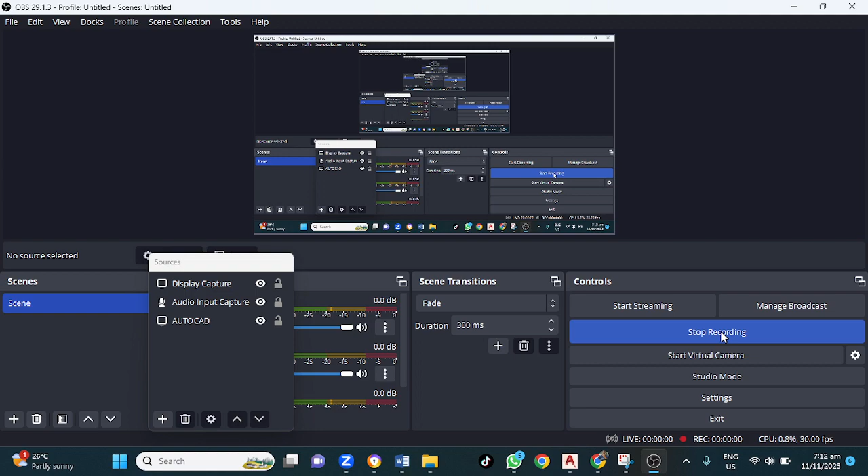Welcome back, guys. In this new video, I will be showing you how to draw a gasket.

This is a gasket mechanical component. The first thing to do is to observe and study the drawing, and determine how you intend to start it.

Here we have an overall length of 80 and a width of 25. We have three equally spaced semicircles here and three equally spaced circles up here. We also have a line drawn at an angle, and some small circles placed at the middle between these two points. These also seem to be equidistant, and the space here is also equidistant.

The distance between each pair of circles here is 4 millimeters, with a radius of 1 millimeter. We also have a fillet radius here of 2 millimeters.

To get started, the first thing is to establish a rectangle 80 by 25. I am already in my construction layer. I'll type REC for rectangle, enter, left click, drag, enter 80, 25, enter. That is done.

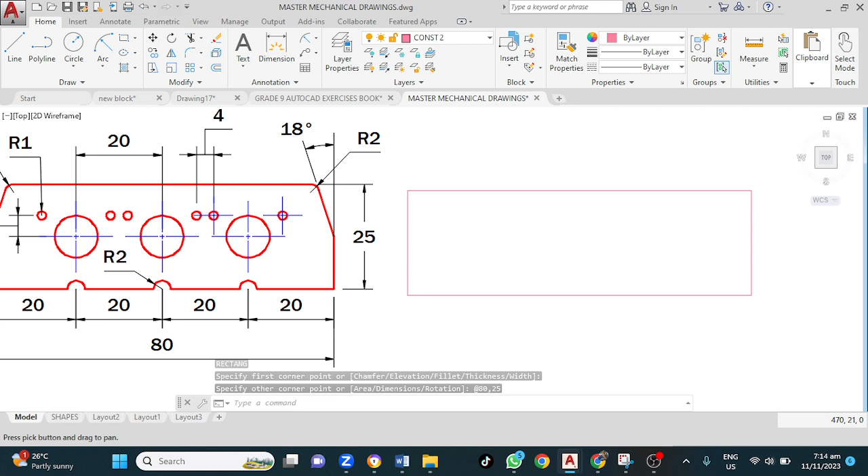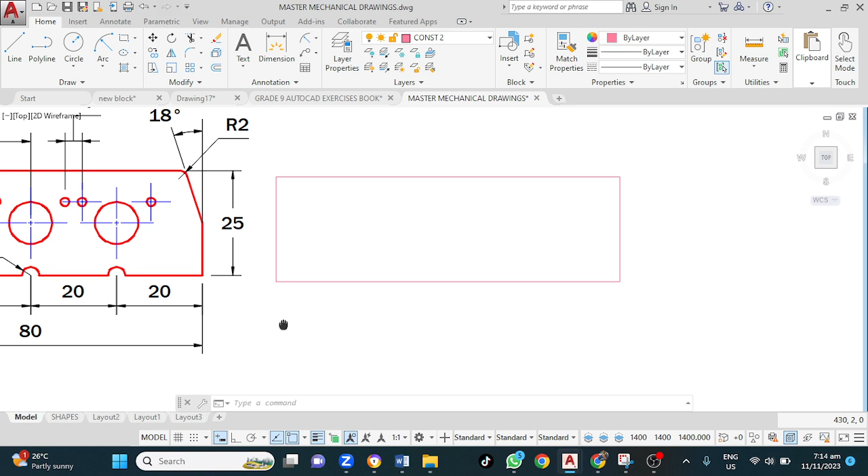My next step is to establish a draw line here. This is 25, so the midpoint is 12.5. I will draw a line from here across the middle. So L for line, enter key, left click here, then drag to the next end, left click, escape. That is done.

My next step would be to divide this into, we have 1, 2, 3, 4 equal spaces, which gives us 1, 2, 3 lines. So my next step would be to divide this into 4 equal parts. Type DIV for divide, enter. Left click on object to be divided. Number of segments I want, as requested by the command bar, is 4. Enter.

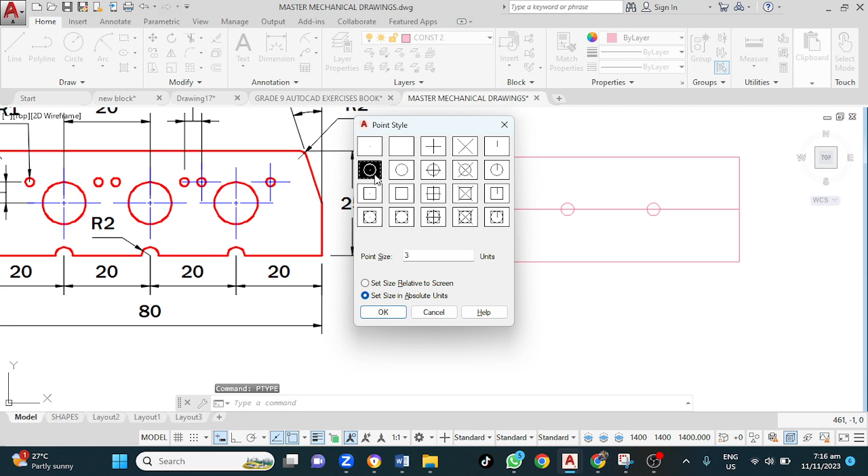Just in case your nodes don't pop up, it's simple. Type P-TYPE, enter. Change from the dot to any one of these, then that's it, just in case your nodes are not visible.

The next step is to explode this. So I left click onto that line, then type X, then press enter.

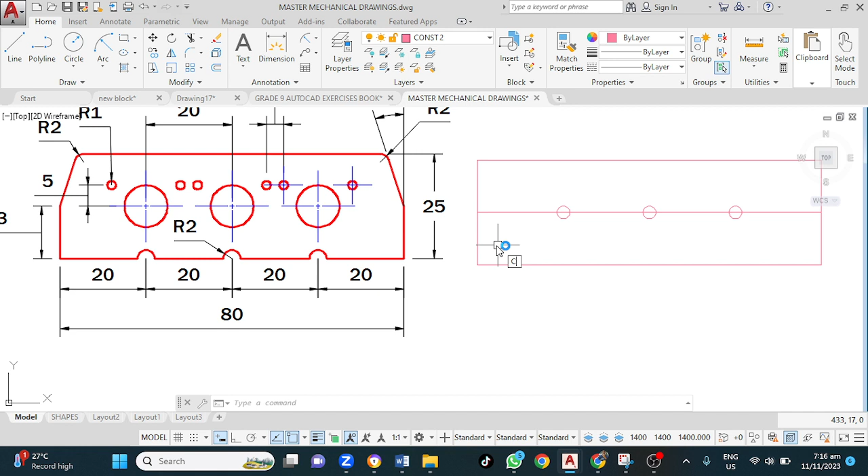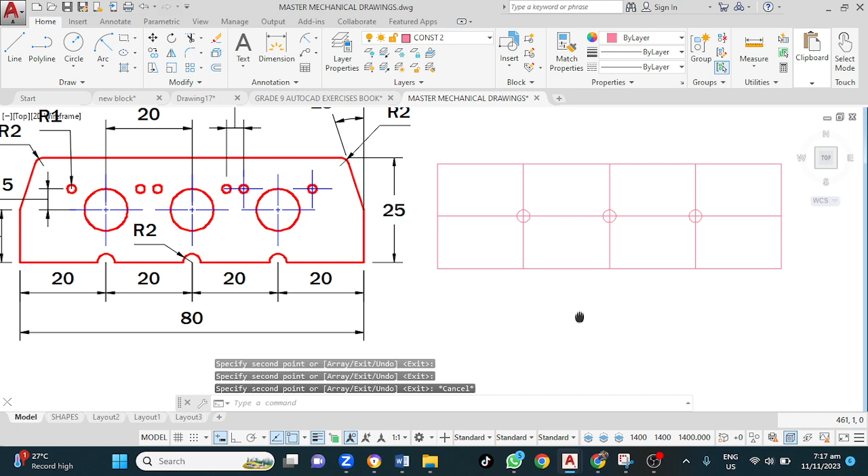This is now exploded. My next step is to copy this line to all these 3 points as seen here. So I type CO for copy, enter. Left click on the line to be copied, press enter to accept the object. It says specify a base point. Left click here as my base point, left click there, left click there, left click there, escape. This is now done.

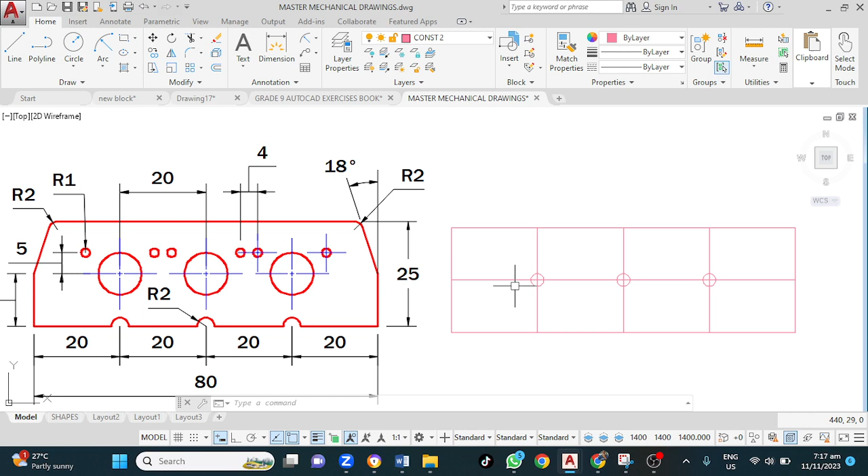My next step is to draw this line here. This is 18 degrees, but we know angles are measured from the horizontal distance from here, so this 18 would be 90 plus 18, which is 108. So I'll draw a line, L for line, enter, left click here, drag a little distance, then press the tab key, tab, 108, enter. Hey, come on.

You'll find that happening, guys - at times the software will tend to draw a line in the opposite direction. So I left click there, tab, 108, enter. There we go. So again, how do we come by 108? Remember, lines are measured from this point. So we go here, up - 90 is here, from here to here is 90, 90 plus 18 gives us 108.

Then I trim, TR, enter, enter, left click here. My next step is to mirror this on the other side, so I left click here to create a mirrored copy on this side. Then type MI for mirror, enter. Left click at the midpoint here, left click at the next vertical point here, then click no - I do not wish to erase the source. So I enter to accept no.

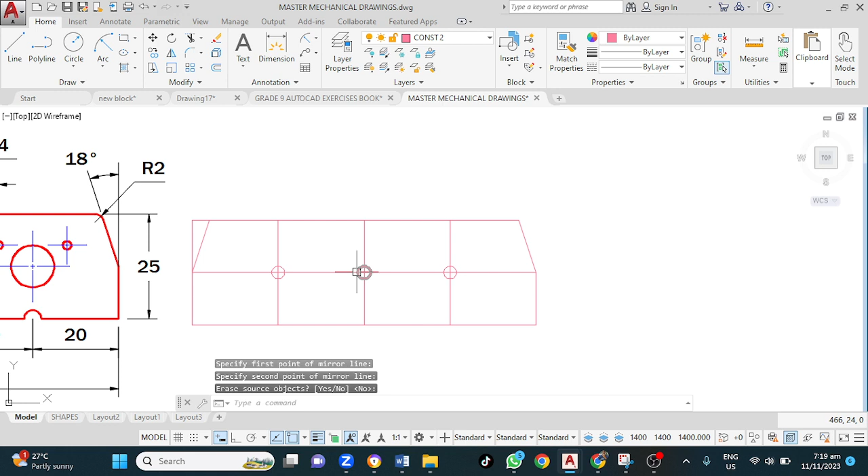That is done. My next step is to trim this section. TR, enter, enter 2 times, left click there, left click there. That is now trimmed. That part is now done. I can now go ahead and draw these circles. Alright, I'll need to label the radius for this circle. Left click here.

Then use match property to change it. MA, enter. Click on this, click on that. That is now changed.

I want to bring this up a little bit more, probably... escape.

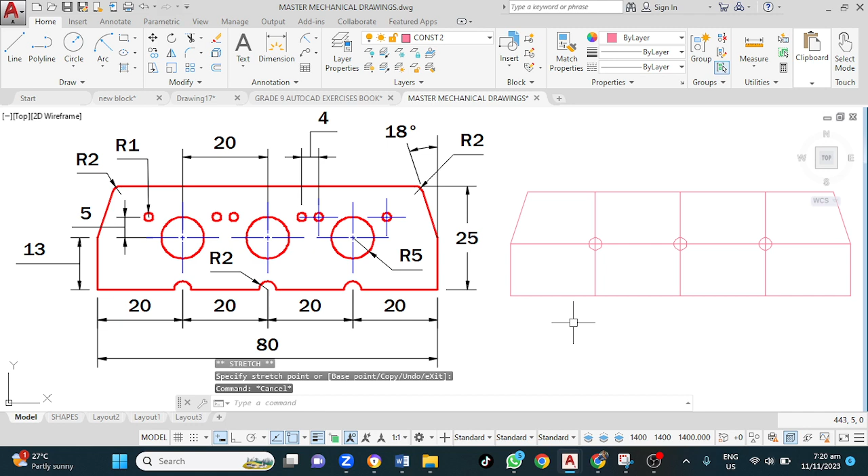So my next step is to draw a circle of radius 5. C for circle, enter. Base center is here. Drag out a little bit. Type 5, enter. That is now there.

So if you want, you could delete these nodes because we no longer need them. So you could delete those nodes.

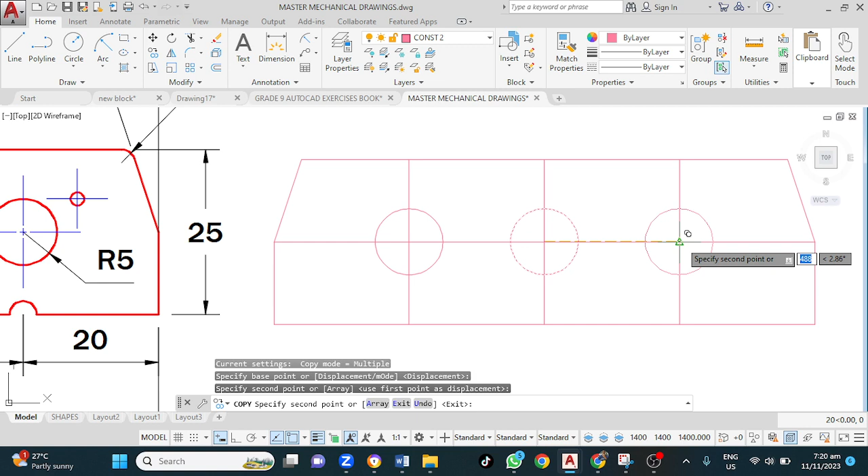Next, we could copy this. Type CO for copy, enter. Left click here, left click there, and left click there. Escape. So we now have those 3, and we're good.

And down here we have a semicircle of radius 2. So we're going to draw a circle. C for circle, enter. Left click here, drag, enter 2 for radius, then enter. Spacebar to reactivate, left click here, drag 2, enter. Spacebar to reactivate, left click here, drag 2, enter.

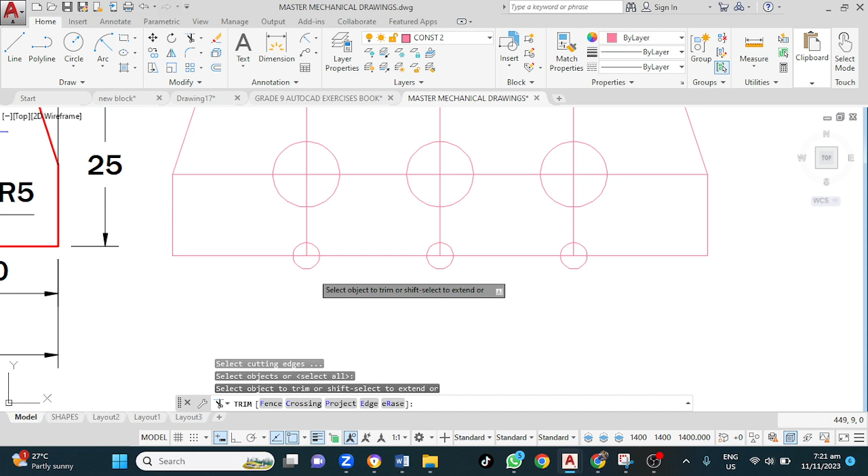We now have these. My next step is to trim away the section. TR, enter, enter. Left click here, left click there, left click there. Left click here, left click there, left click there. Left click here, left click there, left click there. That is now done.

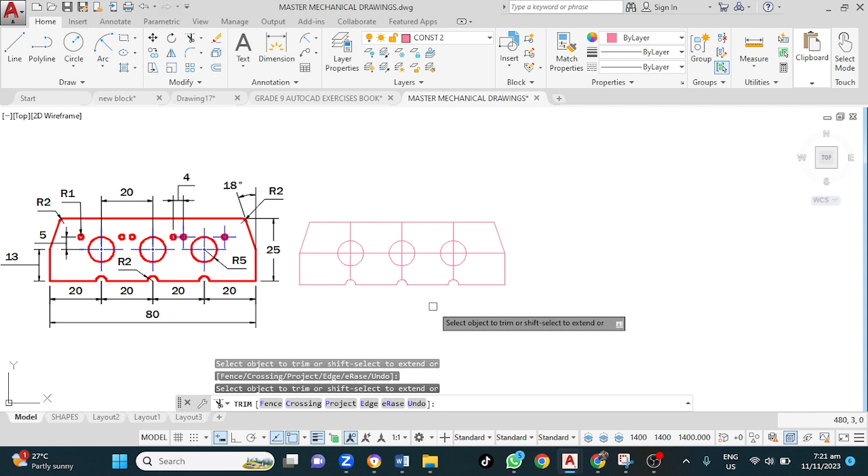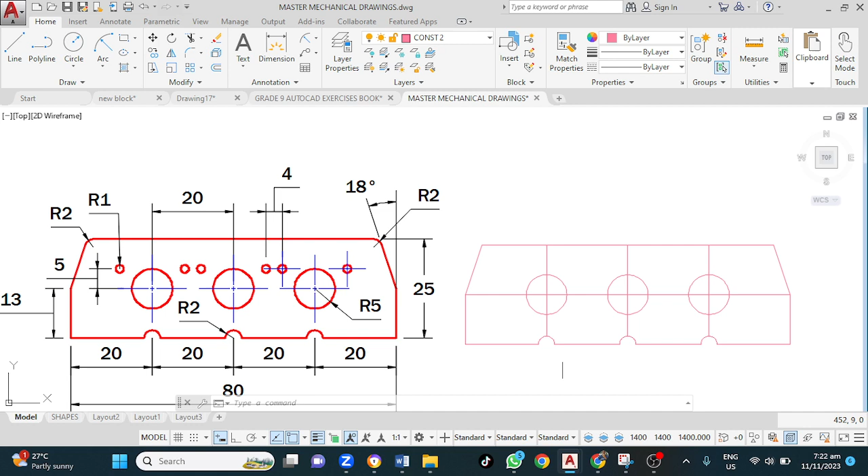My next step is to offset this line up by 5 millimeters to get the center for these smaller circles. So for that, I go offset, O for offset, enter. Offset distance 5, enter. Left click on this line, move up. Escape.

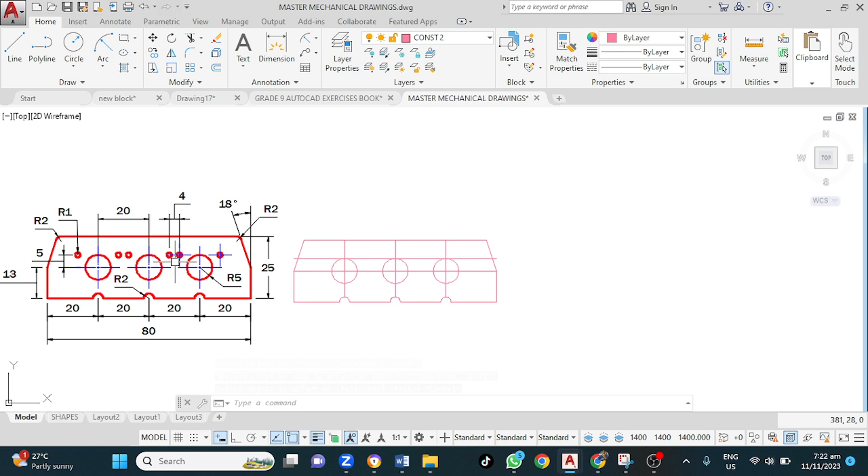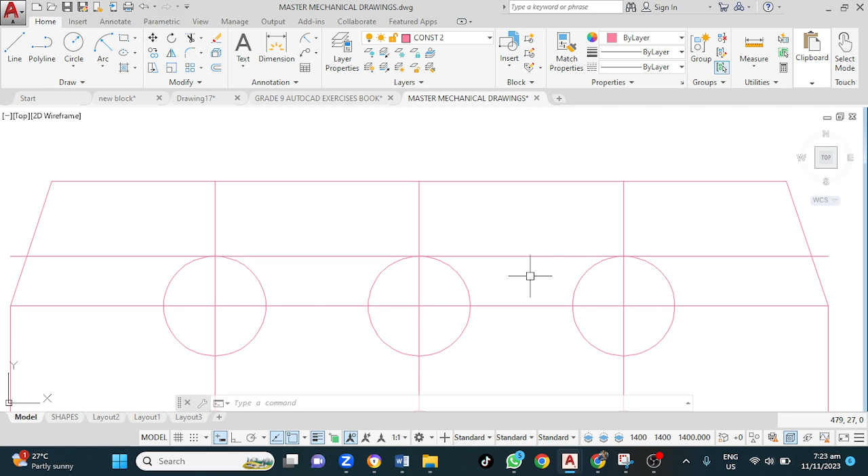Now, these are spaced 4 millimeters apart, and it is in the middle of this. So what I'll do, I will draw 1 or 2, then mirror. So for this, I'm gonna use trim, or yeah, I'm gonna use...

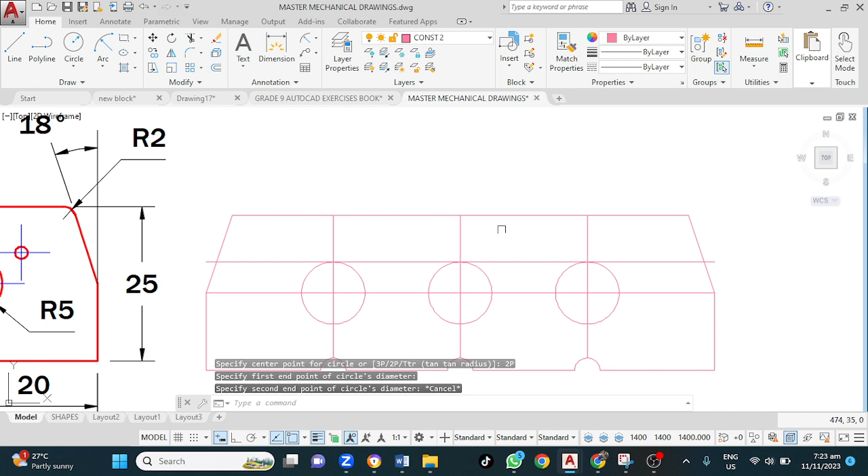I could draw a circle with 2 point, circle 2p, circle, enter. Use 2 points, enter. Then click here and click. I don't need to. I don't think I should use that technique. I don't think I need to use that technique.

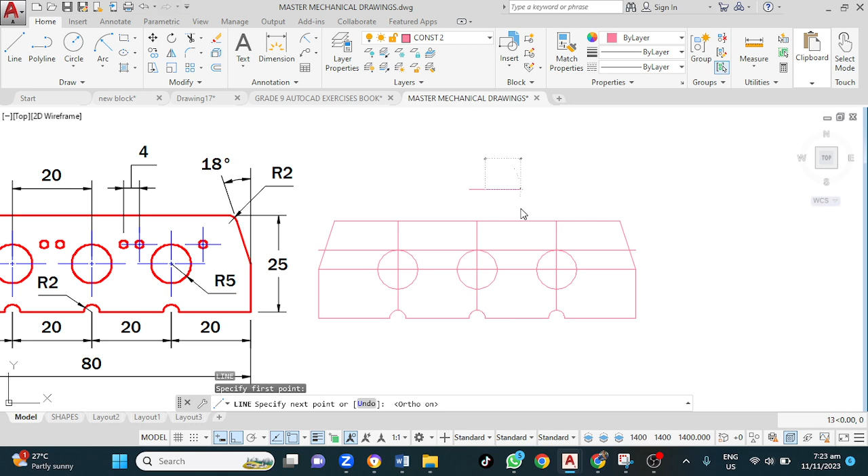So I'm gonna draw these remotely and then paste them here. So for that, I draw a line, L for line, enter. Left click here, turn on my ortho mode. Let that length of line be 4, enter, escape. I then draw both circles of radius 1.

C, enter. Left click here, radius of 1, enter. Spacebar to reactivate, left click here, radius of 1, enter. Now I'm going to move these 2 circles, or copy, left click those, then type CO for copy, enter.

Then choose here as the base point, in the middle as the base point. Now I want this to drop in the middle of these 2 points right here. So I'm going to use M2P, middle of 2 points, enter. And I'm going to click here and click there. That is dropped there. And I'm going to spacebar to reactivate.

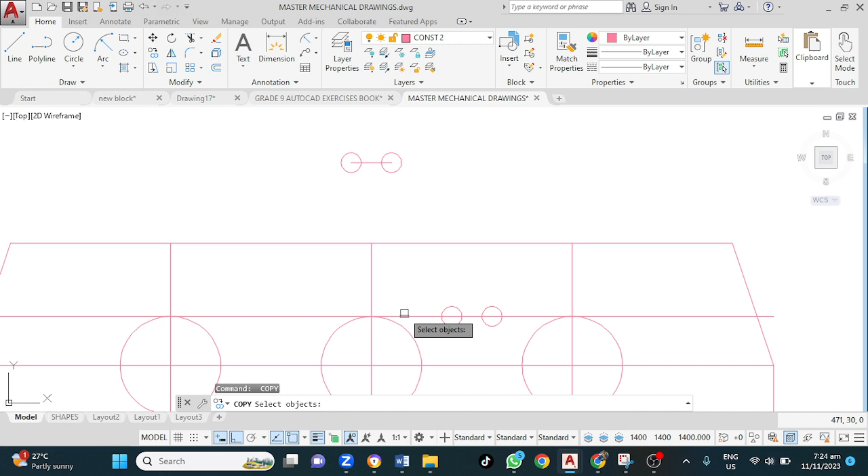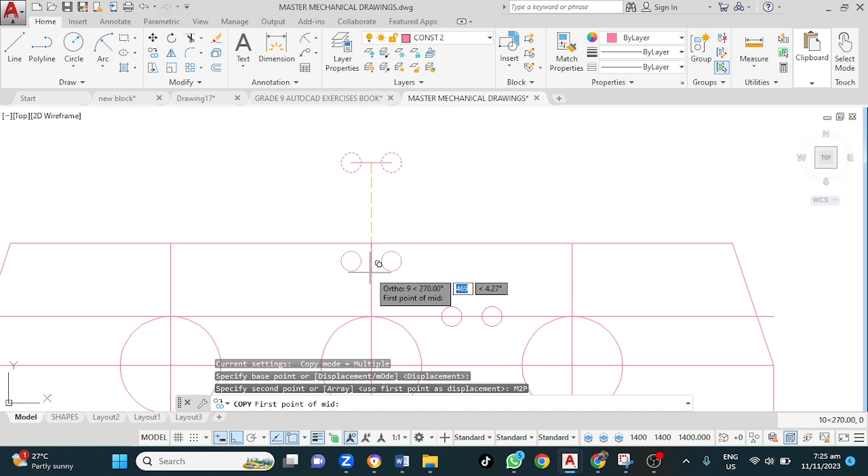Alright, copy. Oh, I didn't have to do that. CO, enter. Enter. Base point is here. Copy, middle of 2 points. Middle of 2 points. I want to paste it. Enter. Now left click here. Left click there. That is now pasted there. Now paste there. Alright.

Now I'm gonna copy. So I'm gonna copy one of this. Copy this. Left click on that. Copy, CO for copy. Enter. I'm gonna choose here as the base point. Here as the base point. Then come here. Paste that right there.

Then I could mirror this on the other side there. Left click here. MI enter. And I'm gonna choose the middle of this figure to mirror that. Enter. And that is now done.

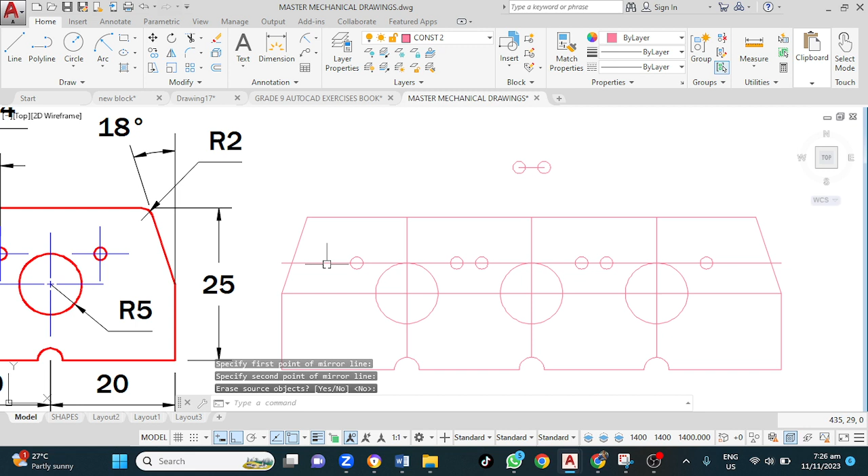I can delete that now. Yep. So what else needs to be done? Oh, the corners. We need to fillet the corners.

So for that I type F for fillet. Type R for radius. Radius of 2. Type 2 for radius. Enter. Then left click here, left click there. And spacebar to reactivate. Left click here, left click here. And that is done.

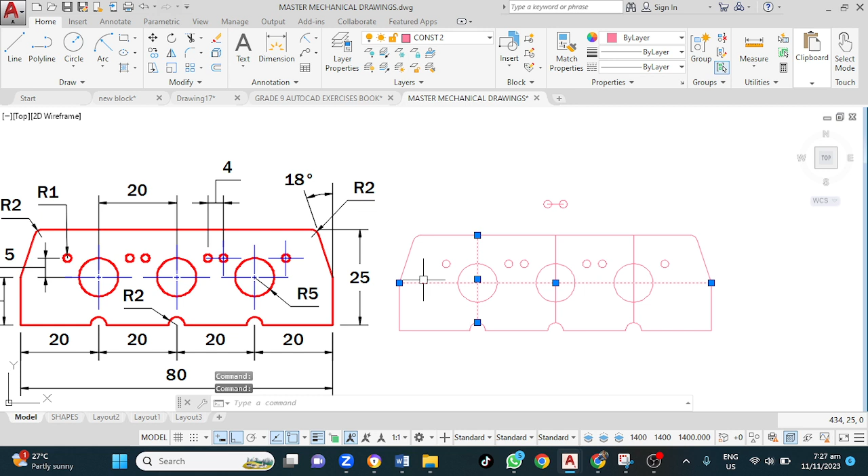And then we can go ahead and delete these now, as we no longer need them. Delete these. Delete. Yes. And then we can change from construction layer to our outline layer. Left click, outline. And that is done.

I will not be wasting time on dimension on this. That is pretty much as how it is. Right? Yes, that's how it is. That is how this is done.